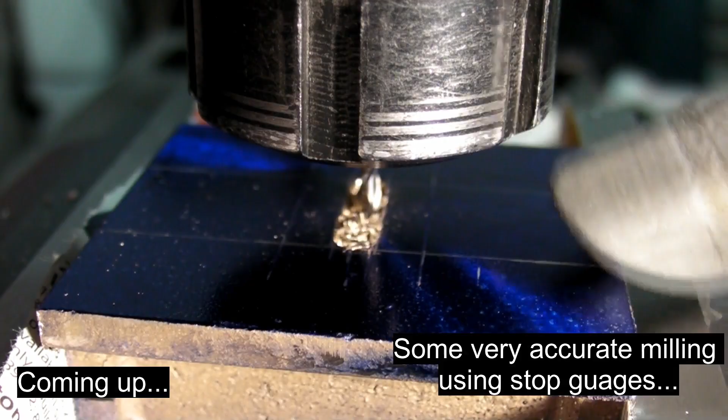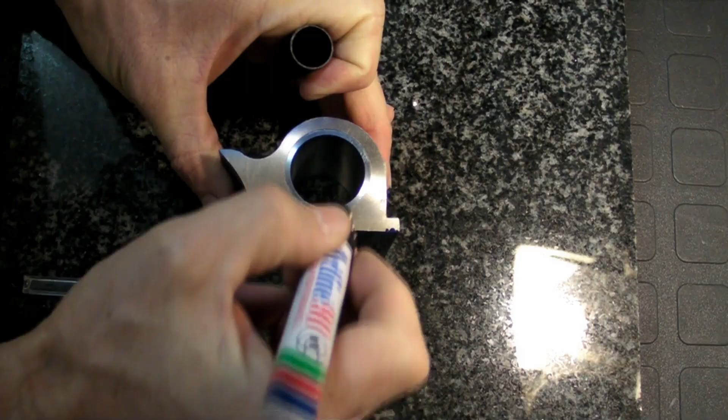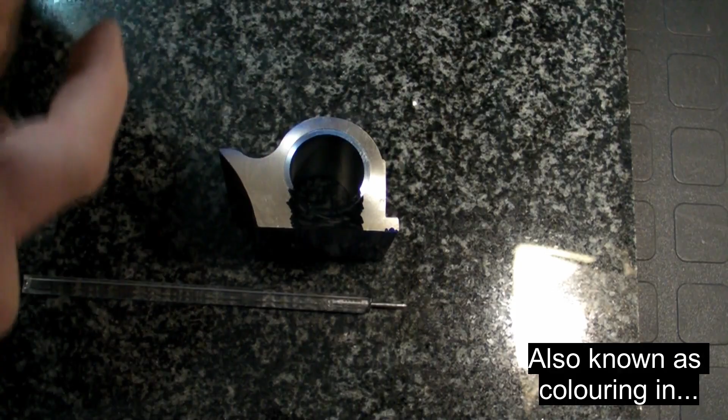So one thing you will see not so often in my builds is me using a ruler. And the reason is, when I was just a little guy in school, I failed using a ruler and marking out. Sorry, Mrs. Hesacker, I'm sure she's watching these videos.

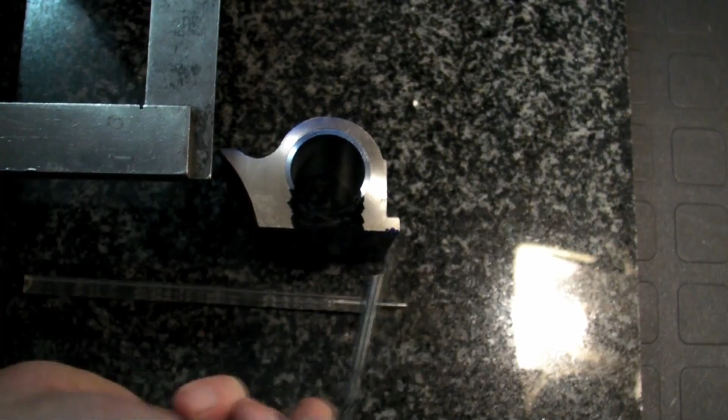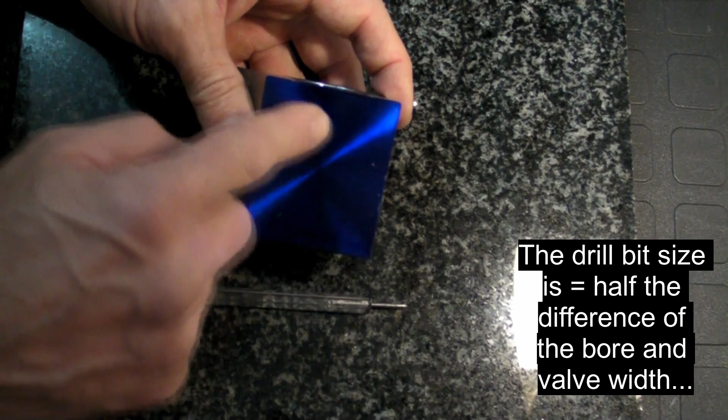Easiest way to do it without using a ruler is, of course, a set square. And what we want to do is mark out where the ports are relative to the cylinder bore on that face. Now, there's two different ways of marking out on a casting - you can buy marking out blue, which comes in a spray can, or you get a marker, which works out relatively cheap. What I like to do is just use a permanent marker, it works just as well. In this case, I've shown both so you can see the difference.

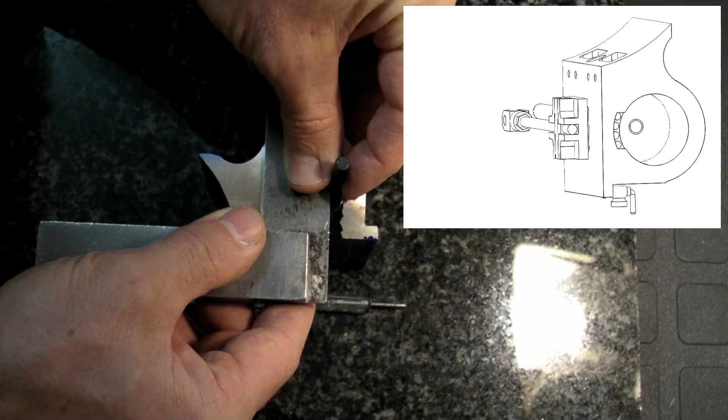Now, the ports need to be centered to the bore. So what we're going to do is find the relative position to the center of the bore, and map it from one side to the other - and of course, not using rulers at all, because I hate using rulers.

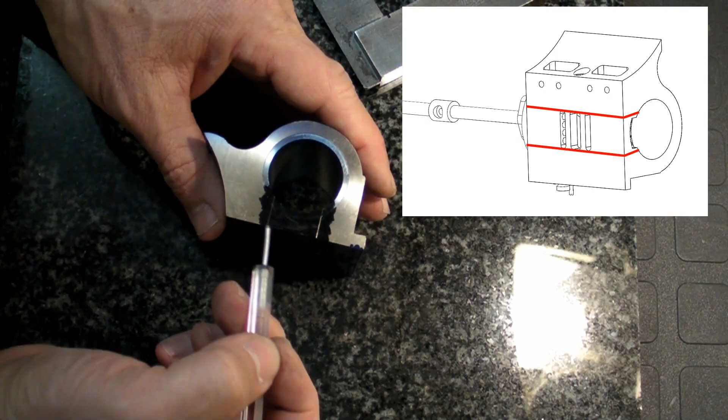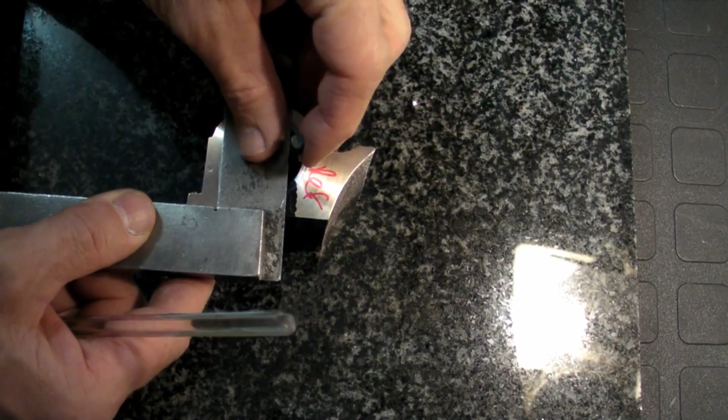So now we have where the port needs to be on this face, and also this is where the port holes are going to be more or less. So let's do that to the other side. Notice how much easier this is than using a ruler. And also, when we tie it up on the valve face, you can see very quickly if you've made a mistake somewhere.

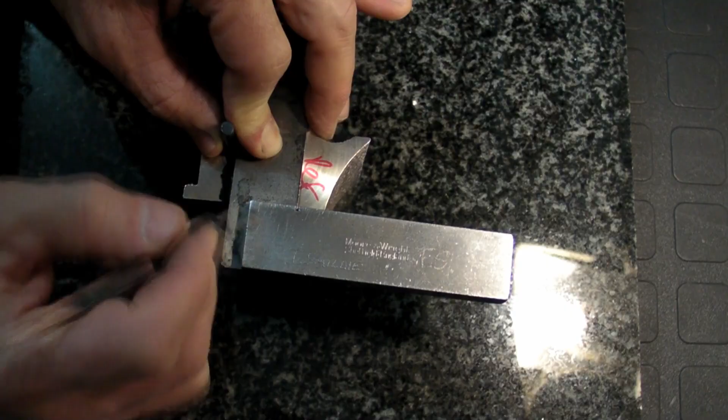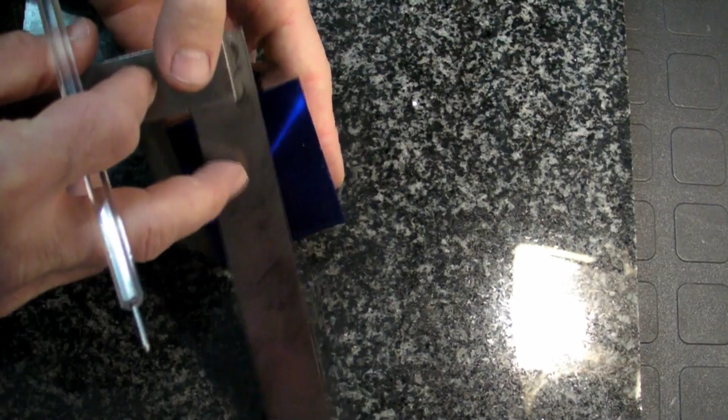Now we have 1, 2, 3, 4 lines, and what we're going to do is just check that it aligns with the set square. And there we go - that looks good.

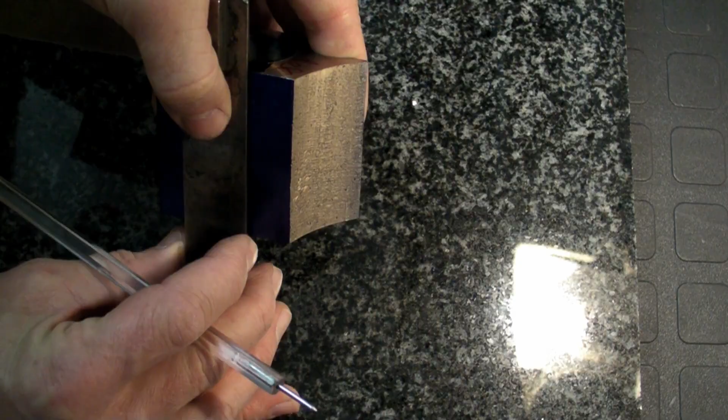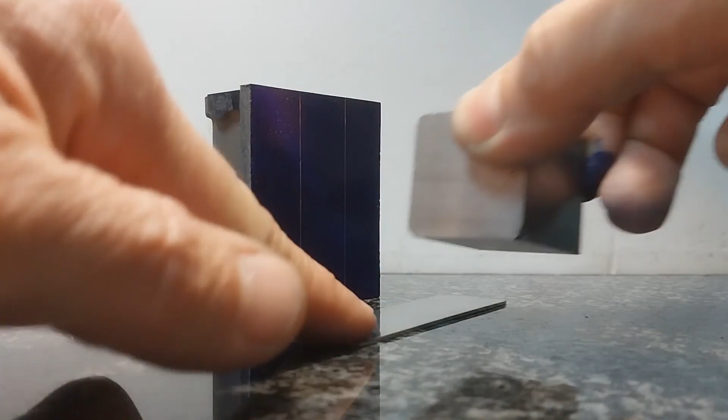And that looks good. To find the center, I just stack it up like I've shown previously. What you do is you just draw a line, you flip it around, and if those lines match up, you know you're spot on center.

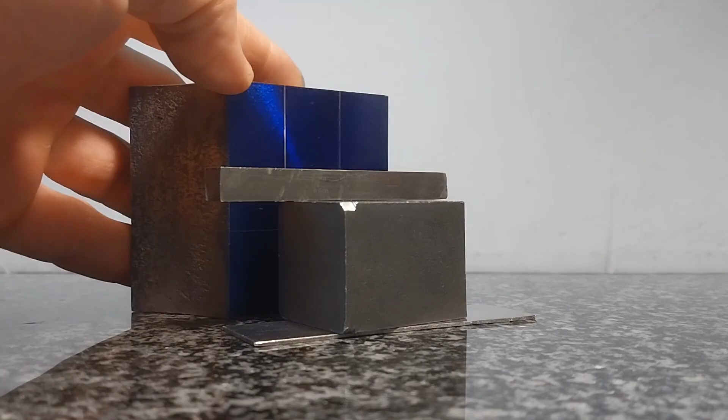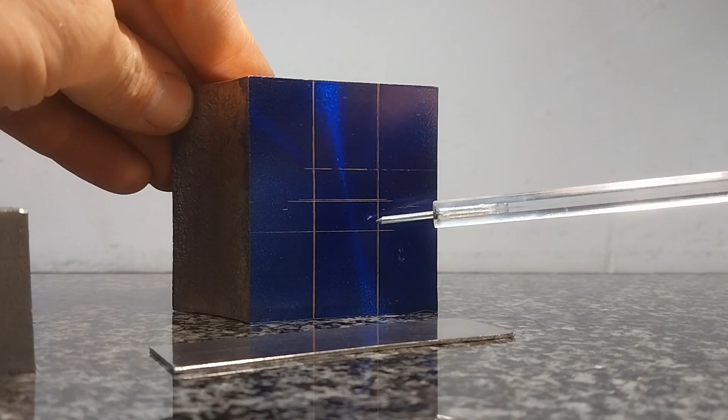That looks pretty good. To find the center line of the steam ports, it's again just adding another scrap bar and drawing a line. So then that's the center line of your exhaust port, and that's the two center lines of the steam ports. They're all relative to the outer faces, perfectly in the middle of the casting, without using a single ruler.

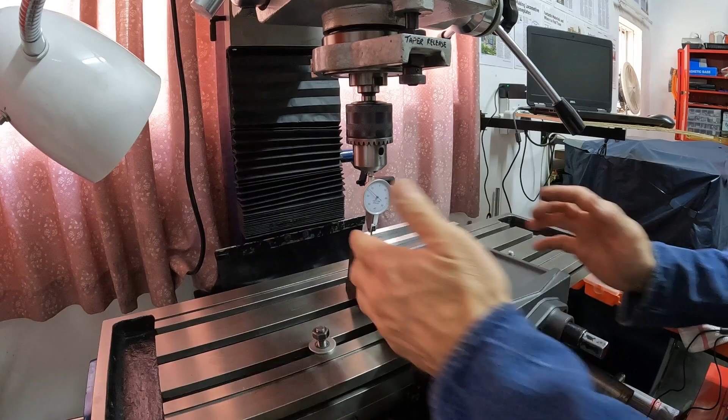It is absolutely imperative that the vise is set up relative to your reference face so that your valve ports are perfect relative to it. Now your stationary part of your vise is what you're going to put your reference face up against - that's the part of the vise that you're going to set for these operations.

And it's actually really easy and quick to set up a vise. What you do is you pull the vise up against one side of the milling slot, and you tighten both studs. Then if you're lucky enough to have a DTI, you bring it so that it goes to zero, and then you wipe the DTI from one side to the other side of the vise. Now my milling machine is relatively fixed, so that's pretty good. But if it was out, what you would typically do is loosen one side and tap it until it's back on zero.

And what you're looking for is typically about 10 micron from one side to the other. And that looks pretty good, so I'm happy with that.

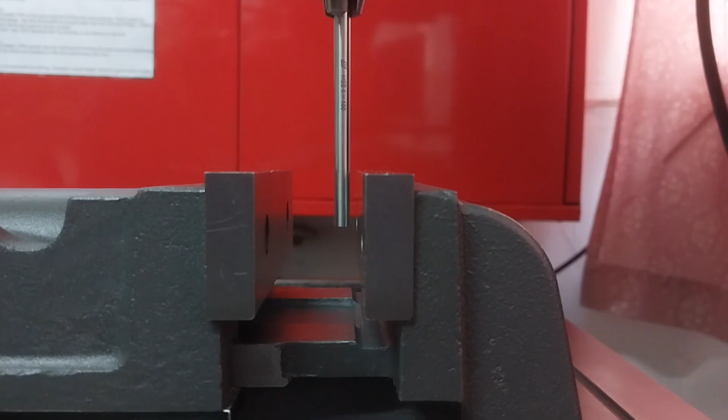If you are not fortunate enough to have a DTI, you can use the touch and engage method. All that you do is put a piece of high-speed steel into the chuck, and just let it touch the fixed jaw. You note the reading on your dial gauge, take it away, and bring it all the way to the other side of the vise. You repeat that operation - move it till it just touches the fixed jaw, and note what's on your hand dial. Now you want both sides to be exactly the same.

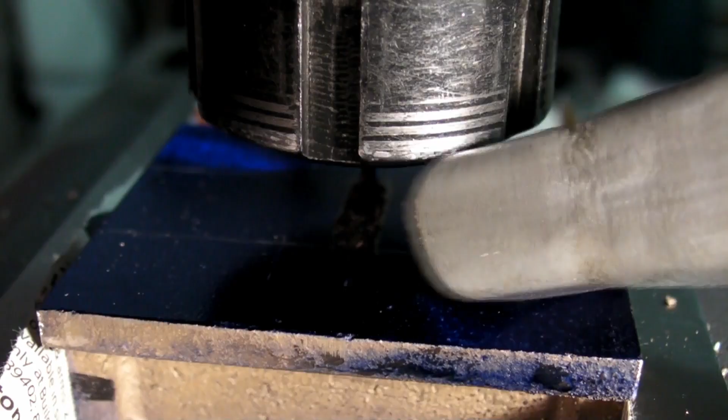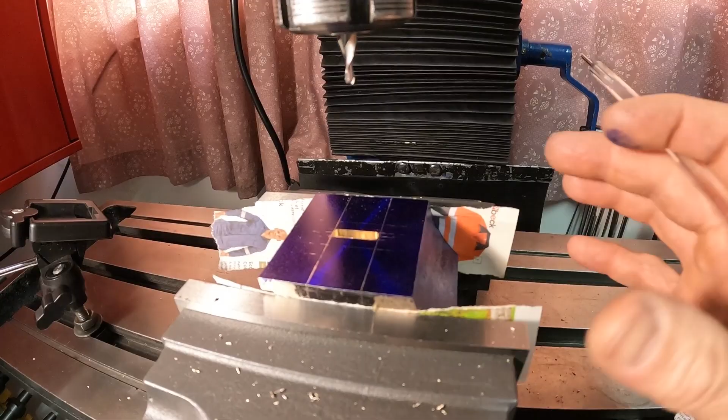Let's quickly talk about holding this casting, there's a couple of tricks here. First, I'm holding it along the length of the cylinder, and the reason is there's no chance I'm going to crush the cylinder when clamping it in this direction. Cylinders are typically a lot stiffer in this direction, so that's perfect, and it has the added benefit of clamping your fixed jaw on a reference surface.

Also have a look that I'm using newspaper between the fixed jaws and the casting. That does two things: it holds the casting beautifully, but also it doesn't damage the machine face that we've just machined.

So to get that nice crisp beat that each builder is looking for, one of the things you need to realize, other than designing the ports properly, is the ports need to open along the full length of a line, and it needs to open uniformly. If the valve opens at an angle, you tend to get a sort of fizzing sound before the port opens, and you don't get a nice beat.

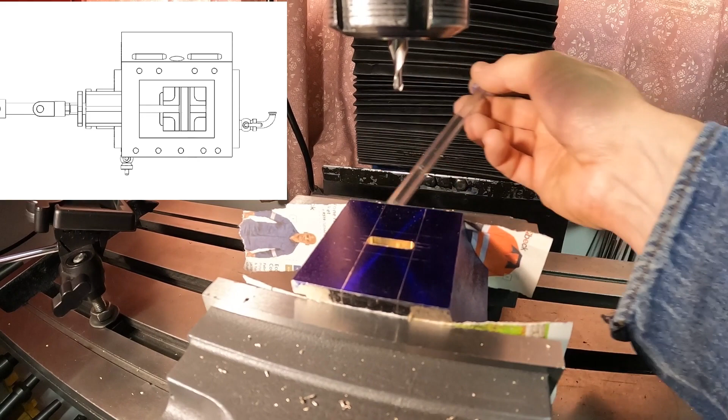Now this is always the piston side of my builds, and I always use that side as reference, and it's always against the fixed jaw, and that gets done for both cylinders. If the rod goes that side, the valve rod will also be above it, and if we line up that jaw relative to the piston in this direction as well as the valve rod, provided the valve is made properly, you know it's going to open perfectly along the full length, and this needs to happen for each valve port.

Now in my video it looked like I was doing CNC machining around the length of the port like this, and I was doing it blind because there were all the chips lying on top of the casting, so I had no idea what was going on. Believe it or not, I do not have a CNC machine, nor have I any intention of ever buying one. So how did I get that right if I was machining blind? Well, it's a little trick I learned.

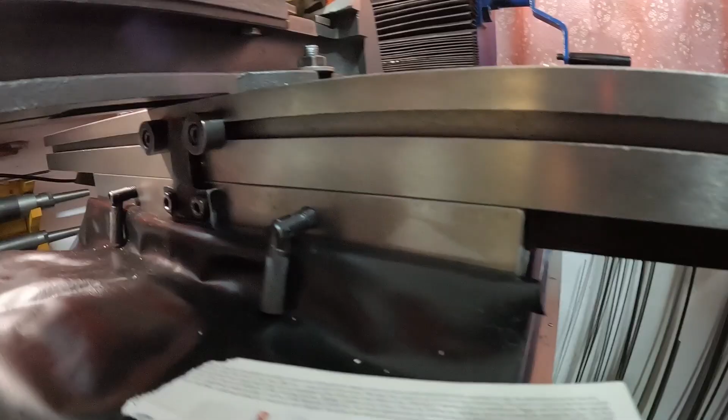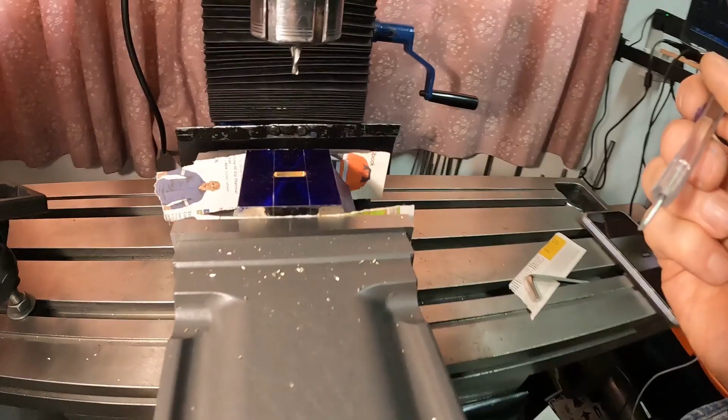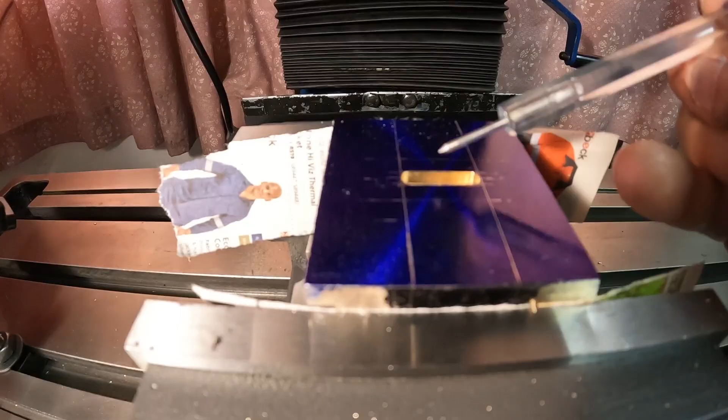Most milling machines come with these beautiful slots on the side of the machine, and you can put in nice stoppers to stop the direction, typically that would be the direction over there. So that side is sorted, but what about this side? Most machines don't have that. Well, every one of my machines, I add a system to the side so I can do exactly the same thing. That allows me to walk around this port in one smooth operation, and each cut is perfectly on line with the previous one. Now you can actually see there's no steps along the length here. So this turned out pretty good.

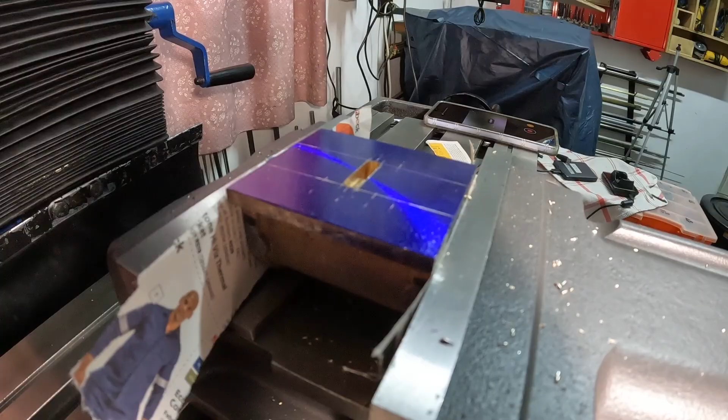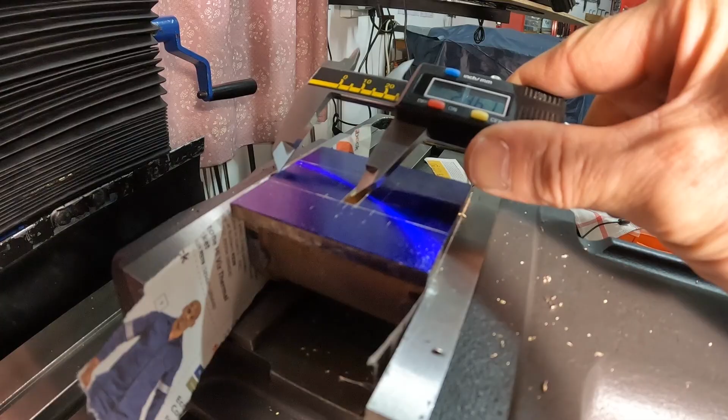So this is the first time I'm actually going to use a measuring instrument. Now that steam port, the exhaust steam port, needs to be more or less in the middle of the casting. So what I'm going to do is measure from the side to one side and the other. Now I got 28.66, 28.6, 28.7, somewhere around there. So now what I'm going to start doing is shimming my stops until I get that size port exactly where I want it, and we're going to move from there.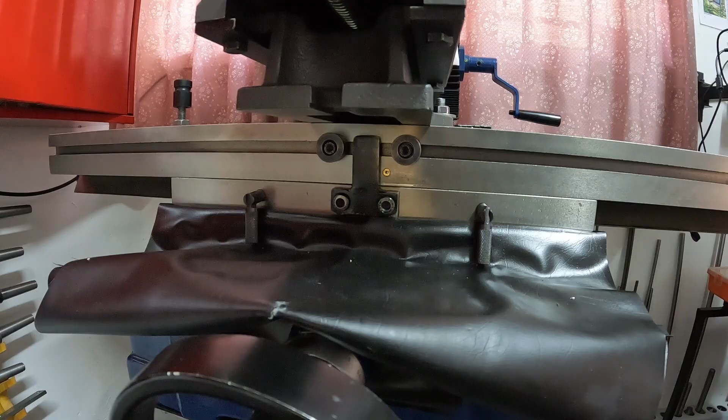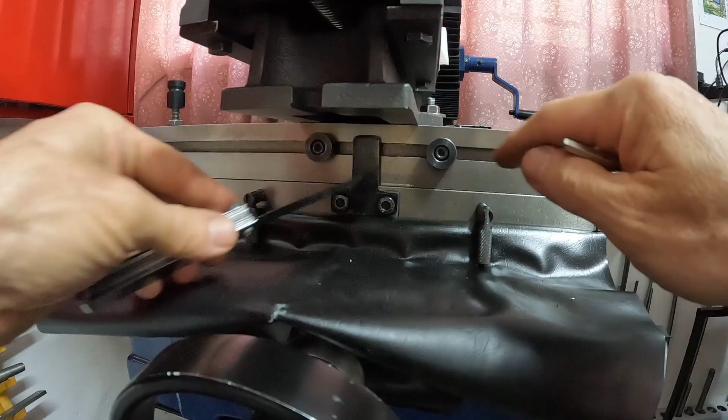It's a bit of a fool's errand trying to bring up something against the surface that you don't want to mark, and we already have these nice stops. So if you want to open up the slot, it really is just a matter of bringing it up against the stop, loosening up that stop, and then I like to use these feeler gauges that you typically get in the automotive section. You just bring that stop up against that feeler gauge and give it a bit of a tight. Then you know you've opened up that slot by exactly the right amount, and you didn't need to bring your tool up against a surface that you don't want to mark.

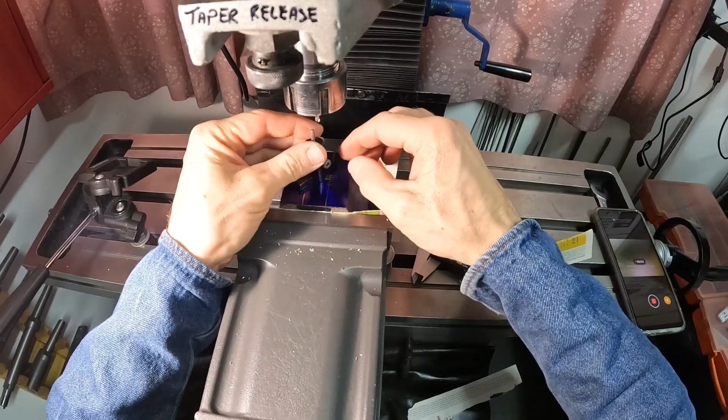To measure the depth of this port, it's actually a good idea to make one of these little depth gauges, and that is spot on. So now what I'm going to do is move this down, zero it, and lock the slide when I open up that port.

A couple of additional points when doing these ports. Even though you do sometimes get ports that are, say for argument's sake, 3.2mm width where a 1/8 milling cutter would be perfect, it's a fool's errand to use that milling cutter, because typically a 1/8 milling cutter will machine those slots to an oversized slot, and that's not what you want. So in this case it's a 3.2mm slot, and I'm using a 3mm slot drill just because that was one of the last milling cutters I actually sharpened. Typically what you do is machine each slot using the stoppers I showed, and then as you go, you measure each important dimension.

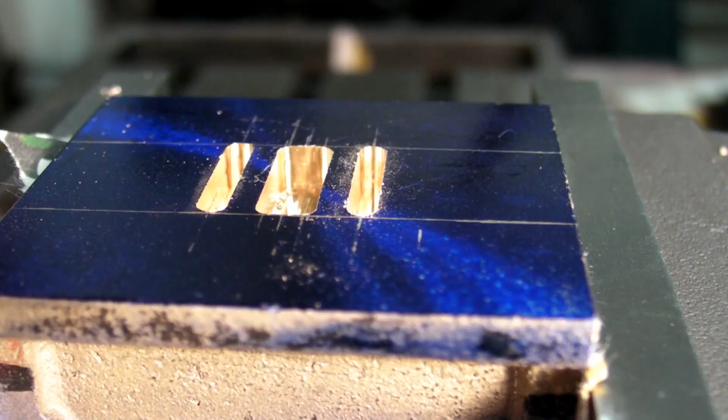The width of the slots is important, and also the gap between the exhaust slot and the main steam slot. It's important to open the slots carefully as you go, since they're never machined size for size right from the beginning. That way you can correct any errors you typically find when machining, as you go. So we can't really go further with these cylinders at this point.

You might have noticed that each step in the machining process had a very specific goal. We did the bores and made sure there was no casting inclusions. If there was, we made a plan with the sleeve, problem solved. Then we went on to these valve ports that needed to machine very accurately, and that worked out quite well. If there was any casting inclusion with these valve ports, I would typically scrap the casting. You can fix it, but it's a bit of a mission, so rather just scrap the casting.

If your valve ports are a little bit out, say between 50 and 100 micron, I could live with that. It would still be okay. You're not going to win any efficiency competitions, but you're still going to have fun with your little steam engine, which is what it's all about anyway. Most of the indiscretions on these valve ports can actually be corrected with the valve itself, and I'll show you how to do that when we get to the valve. But typically I wouldn't scrap a casting if it's a little bit out.

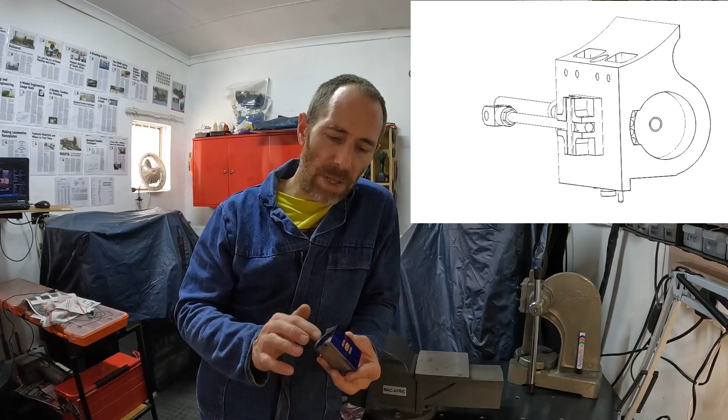One thing we cannot do at this point is drill the cross holes from the edge of the cylinder to the steam intakes, and there's a reason for that. The minute you drill that, you deform this cylinder at the very end, and it becomes very difficult to check a piston fit. So before we carry on, let's make those pistons. Let's make sure that piston and cylinder fit is perfect, and then we'll know if we create a bit of a burr and it gets stuck, that it's not the fit. We just need to deburr it a little bit in the offending area.

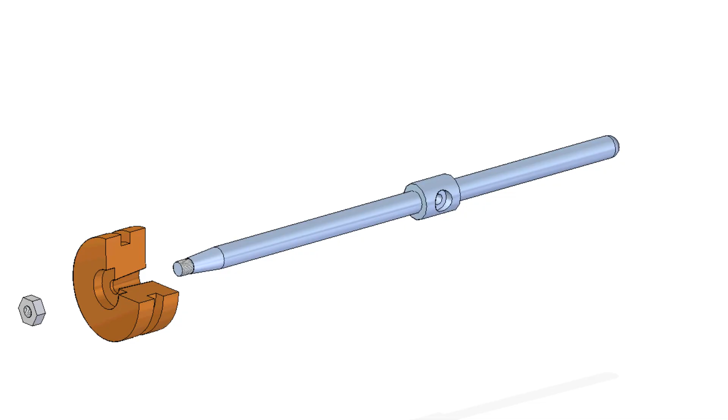Let's do those pistons. There's typically two fundamental ways of making a piston rod assembly. The first one is a taper fit with a locking nut at the end, and that works fine, no issues. I personally don't like that way of doing it, because with a taper, something could go wrong, the nut could come out. It's just not as robust as I would like on my steam engines.

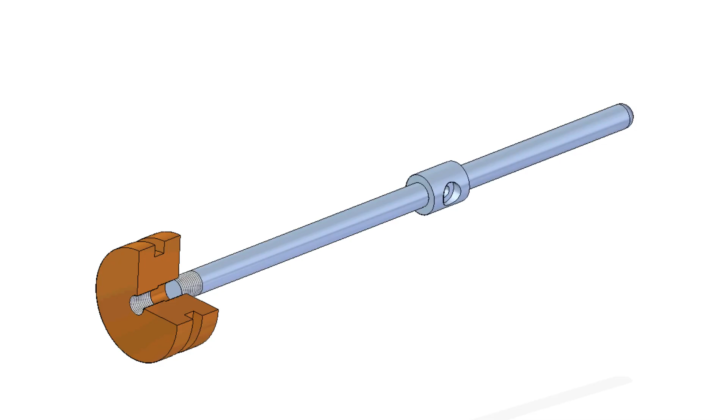What I've found to work incredibly well with all of my steam engines is an old technique that a lot of the older designs incorporated, and that's a combination of a screw thread pitch and a press fit. If you tighten that very tight onto the press fit and knock the ends of that thread, you know the piston is not going to come off the piston rod. That's typically how I do all of my pistons.

The best way to get rid of tolerance stack-up between the rod and the piston is to machine it as an assembly. Then you know it's perfectly concentric and you won't have any sticking issues from one side of the cylinder to the other. So obviously you need to make your components. Typically you start with a piston rod, and that's really easy - it's got a couple of machining operations, forming operations, and thread cutting operations. Easy peasy, went like this.

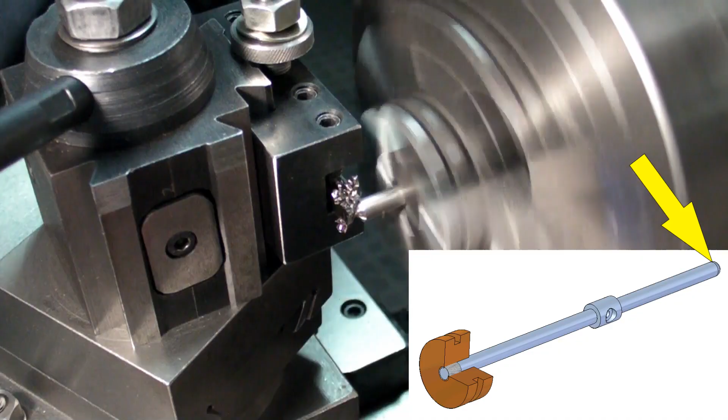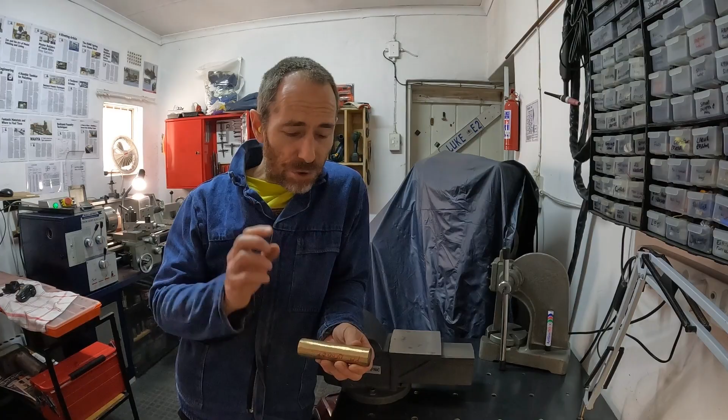Now that the rods are done, we need to do the pistons. I don't buy bronze because I'm not rich, so I cast all of my bronzes, typically a type of tin bronze. I try to use the risers from my castings generally, but I don't use the same riser for the same castings - in other words, this is not the riser from the cylinder castings. I try to use a slightly different mix for my pistons than my cylinders, because you don't really want perfectly identical materials rubbing up against each other. Bronze is quite forgiving though, so you'll probably be okay if it's your first casting and you want to use the riser for your piston.

There's some tricks to doing this. This riser I'm using here has been cleaned, fettled, and ground, and the surface is a standard ground surface. That is not great to hold in a 3-jaw chuck. Typically you want a nice clean surface for all 3-jaw chucks to hold, and you want it to hold along the full length of a line in 3 spots. If you don't have that, the tool is likely to bite into this material, rip it out, and it will just misbehave and be a flat-out disaster.

So the pistons will be machined slightly oversized and then assembled to the rod, and then I can do one final finishing cut and test it to the cylinders itself. Let's get to that.

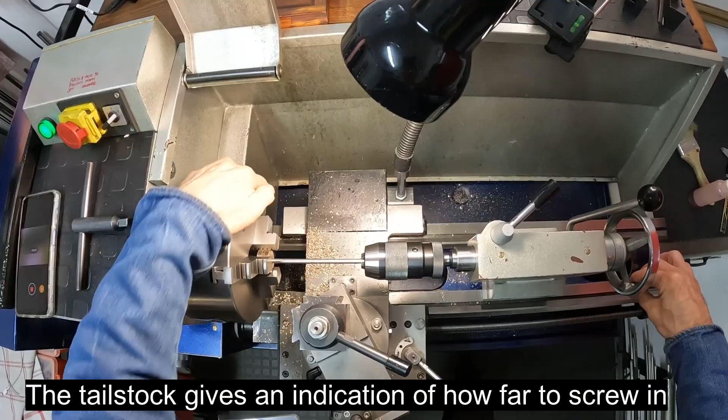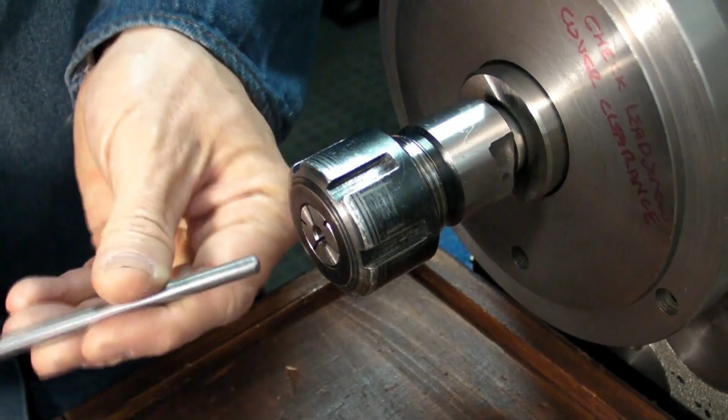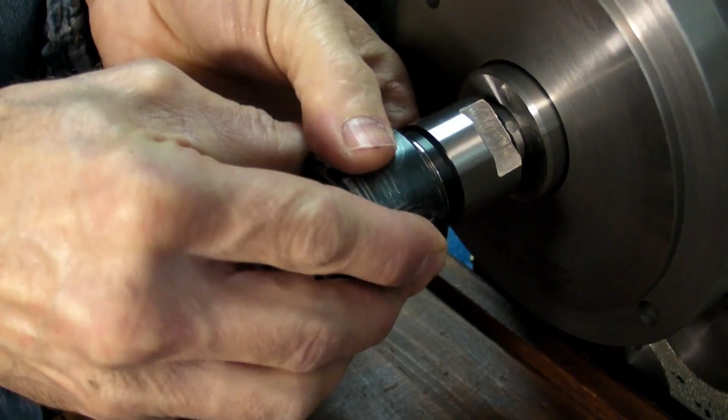It's highly unlikely that a chuck will give us the concentricity accuracy needed to get this piston perfectly concentric to the piston rod. Most lathes come with a taper on the spindle, which is far more accurate than a chuck, and a collet is a beautiful way to hold the piston rod accurately. That's how we're going to do these pistons.

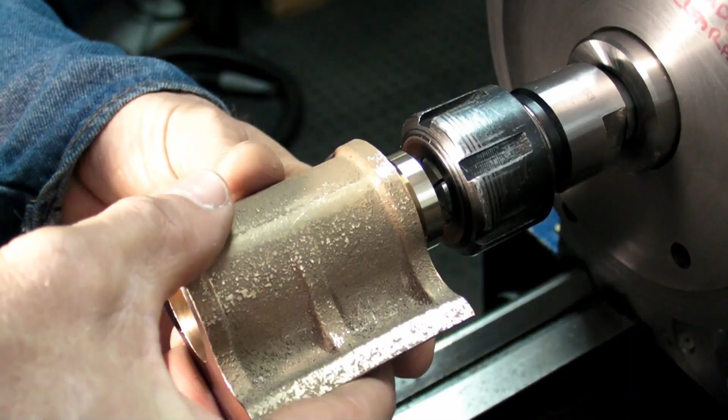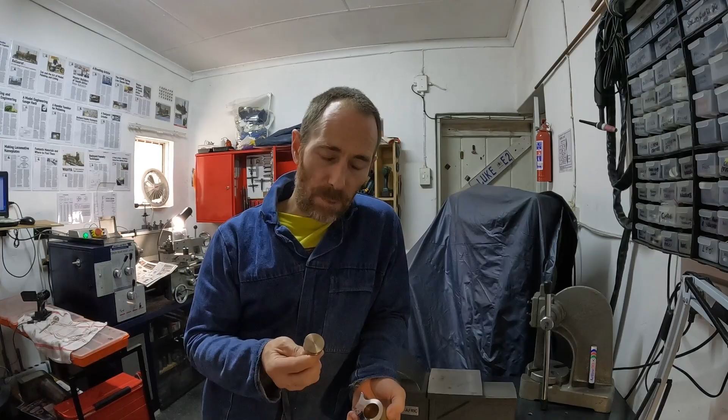Okay, so we've just machined the piston rod assembly, and each piston rod assembly is made to the specific cylinder. Now you saw me using high-speed steel. It's a sharp tool, and I don't take more than about 20 micron cuts, 10-20 micron cuts when I get close to my size. If you don't use high-speed steel that's incredibly sharp, you'll get tool chatter. So stick to the high-speed steel - it's really worthwhile using when doing your finishing cuts.

Now we are looking for an incredibly tight tolerance. It's a steam tight but mechanically loose fit. How do you measure that? Mechanically loose is really easy - the piston needs to move up and down the cylinder with no appreciable resistance. Easy enough. The steam tight is a little bit trickier, and there's a number of ways of doing that.

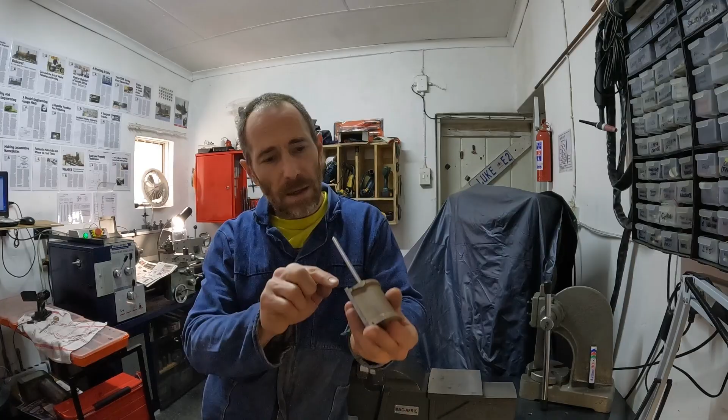The easiest way to do it is to just put the piston down the cylinder, put it up against the light, and what you don't want to see is any light shining between the piston and the cylinder itself. If you get that, that's probably about the lowest end of the spectrum you're aiming for for a good steam tight fit.

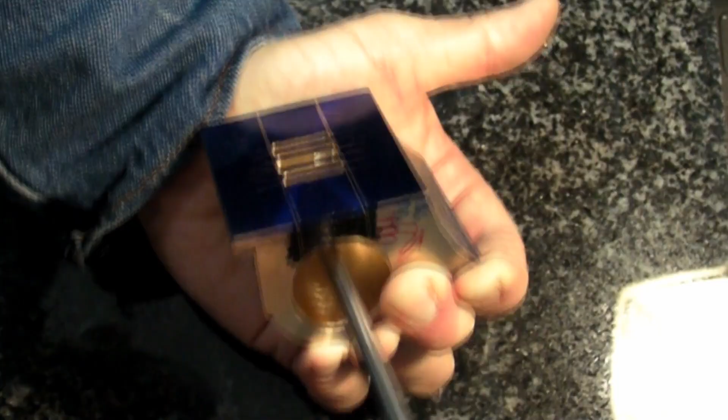I like to check my fits slightly differently, and there's two different ways that I check. The easiest way is to stick the cylinder up against the palm of your hand and create a nice seal with the palm. If the piston is at the bottom of the stroke, you shouldn't be able to pull that rod out. And I am genuinely trying now - in fact, I'm whitening the palm of my hand. If you pull the piston out to about halfway and seal up again, and pull vacuum on the air left in the cylinder, it should bounce back, which is exactly what it's doing. This is a really good steam fit.

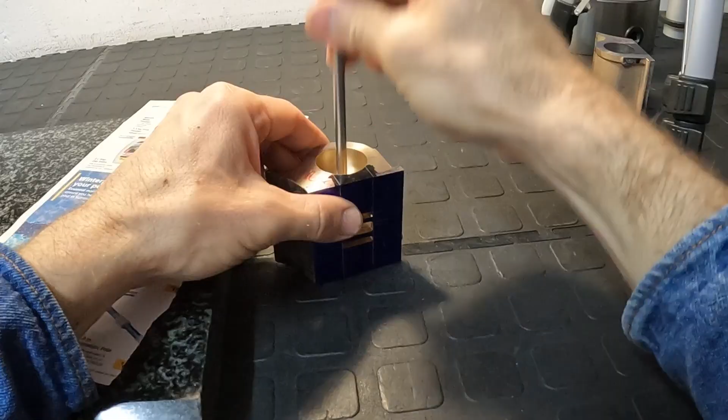I'm happy with that. Here's another way that I like to show a good steam fit. What you do is take your cylinder, put it up against an uneven surface, preferably some other type of rubber or plastic so you don't damage the end of your piston, and just drop your piston in - it should drop freely to the bottom. If you take that cylinder, put it up on a piece of flat surface with a piece of newspaper underneath, then it should go down much slower - in fact it should ooze down to the bottom. If it actually gets stuck somewhere along the route down to the bottom, that's not a bad outcome, because that means you actually have an incredibly tight fit, and that's what you're aiming for.

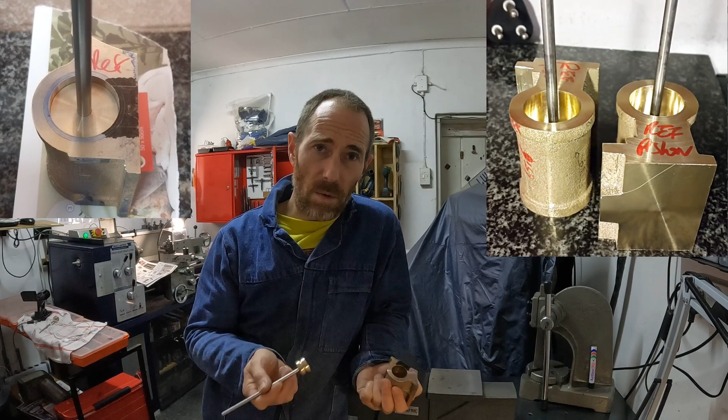Now, you may think this was a fluke, a once-in-a-lifetime fit for a cylinder and piston, and it's not repeatable. Well, no. If you use these techniques, you will get this fit every time, and I get this fit first time with all of my cylinders and pistons. Here's a couple of examples of the piston and cylinders I've done over the years.

So it's only now that we've checked the fit of the piston in the bore that we can go further with the cylinder, and there's a good reason for that. If we start drilling the drain cocks through to your bore, you end up with a burr - how do you check your fit? You're going to hit that burr. Now that we know we have a good fit, any burr is easy to correct because we know where the problem is. The same holds for the steam ports at the edge of the cylinders. That's why I check it now and not after I've done all these other operations.

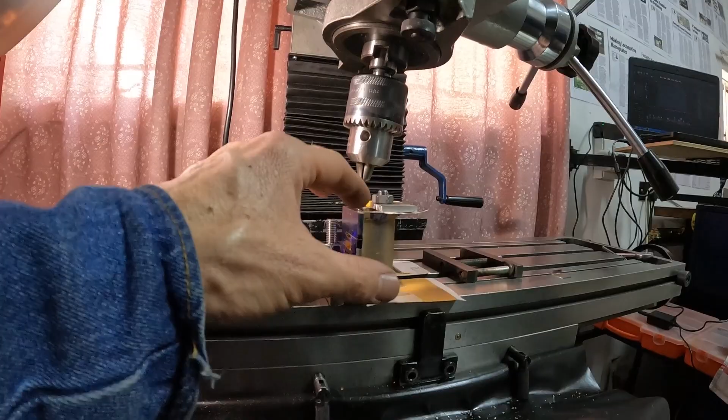This is something that a lot of steam engine enthusiasts tend to battle with, and they get very nervous when they need to drill these holes from the edge of the cylinder to the steam ports.

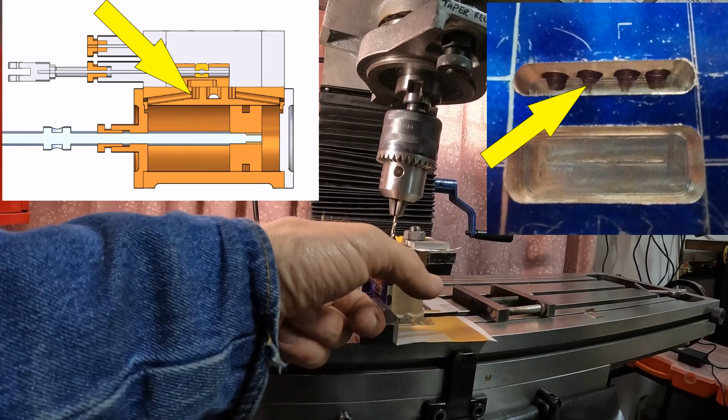Here's a couple of tricks. When I do my designs, I set these holes to the bottom of the steam port. If you break through the steam valve sliding surface at the top, that's an absolute disaster. What you actually want to do is be at the bottom of this hole, and even if you go further than the bottom of the plunge, it's fine, it won't make any difference. So these holes at the top, I typically set tangent with the edge of the bore, so when I mill back this slot, there's a little bit of meat between the bore and these holes.

So here's a couple of tricks. With a lot of the older designs, they don't give the angles of these holes. Now I add that to all of my drawings, which makes life a little bit easier, so you know what angle to set the drill. So that's one step sorted out.

The other way of doing it, especially with older designs, is to set up your drill to your first hole, then plunge it, and mark the edge of the steam port to the side of your casting. That gives you a very good indication of where you're going to break through. You can see I'm way towards the bottom, far away from the steam port surface.

So that's fine. You'll also notice I've clamped the cylinder along its length rather than holding it in a vise, since there's always a chance you'll crush the bore. I've clamped it down on newspaper so I don't damage my machine surface. What I normally do is have a bar bolted to my milling table, set up with a set square, then the cylinder gets butted up against it and clamped down. I do holes 1, 2, 3, 4, then change cylinders, 5, 6, 7, 8 - eight holes at once against the stop, then I change my angle and do the next eight. It's a quick and easy milling or drilling operation.

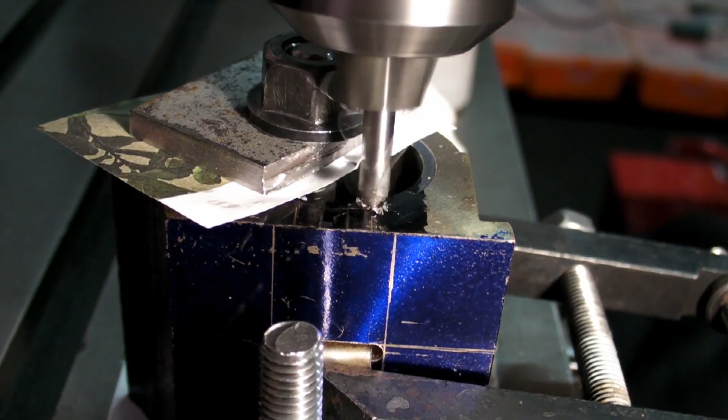What you do need to do is spot each hole with the center drill before you drill it, so you don't get any deviation as you drill your hole down.

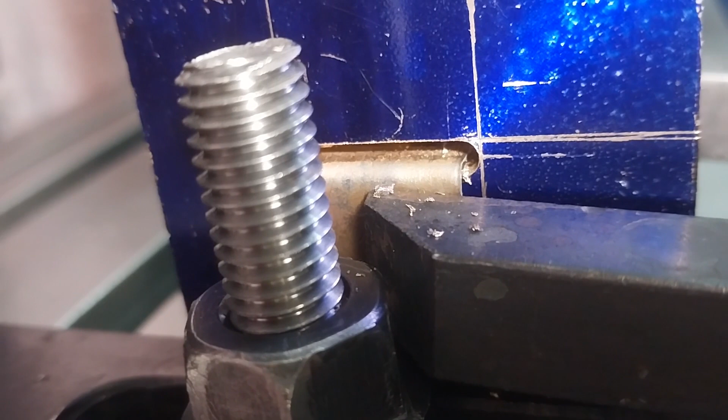Another little trick: a lot of drills tend to drop down towards the end when you're drilling, and there's a very good chance the drill will damage the far side of the steam port. So what I do is make a little piece of bent metal like this, that goes at the bottom of the steam port and gets clamped in place. Then when the drill breaks through, it just hits the plate and you won't damage the steam port.

So to finish off the steam ports for this cylinder, it's really just the exhaust port that needs to be drilled and tapped, and then the drain cocks that need to be drilled and tapped.

Now I can give one tip here. Gunmetal is horrific when it comes to auto feeding. What happens is when you plunge your drill down into the workpiece, it grabs on and pulls into the workpiece, typically destroying the whole casting. That's really a bad outcome.

To get around that, what I typically do is nip the spindle lock just enough so there's enough friction to hold it in place and it won't drop down. Then you won't have any problem with auto feeding. The other way is to take the flute at the end of your drill and grind a flat rake, but I don't have two sets of drills - who can afford that? So I don't like that method. If you just lock your spindle with enough friction so it doesn't pull into the part when you drop down, you'll be fine. So let's finish off this video with the last few operations.